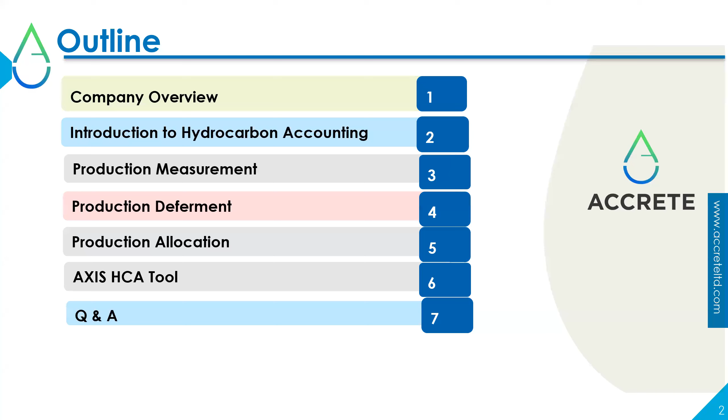So we'll start by introducing our company's services. Then we'll proceed to introduce hydrocarbon accounting and the basic concepts around it. Then we'll move on to production measurement, deferment, allocation, and then we'll discuss the AXIS hydrocarbon tool that we make use of in our company.

Okay, so what are our services? So we are into software deployment of integrated production modeling suite, which encompasses the state-of-the-art Prosper, MBAL, and GAP for managing our oil and gas services. Then we're also into digital oil field services or suite.

Then hydrocarbon accounting - they also offer consultancy services like integrated asset modeling and production optimization. Then other consultancy services includes wireless and remote field data gathering systems that collect data in real time from the field, more or less like a telemetry system. And then this data can be monitored in real time in the office or workstation, as the case may be.

So we also offer training, and highlighted on the screen are training courses on IPM and AXIS hydrocarbon accounting, petroleum engineering courses, and other petroleum business-related courses. We're also involved in other oil field services like wireline and slickline services, directional survey services, which is called gyro, completions and supervision services, drilling supervisions, and manpower services.

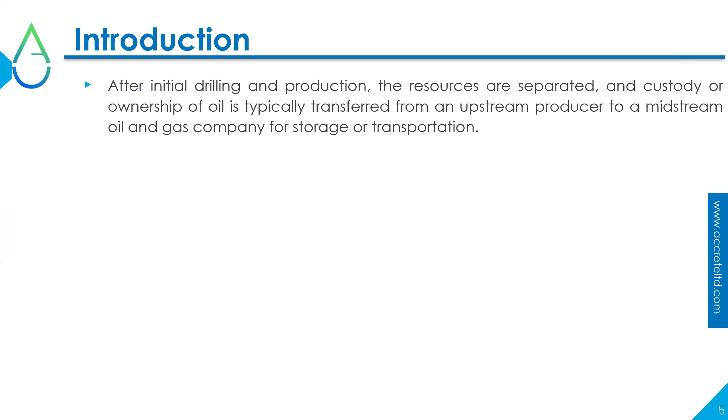As production commences in a typical oil and gas field, the resources emanating from different wells are channeled to a separator, as we all know. And this separator is made to separate the crude into oil, water, and gas components. However, depending on the completion types of the different wells in the field, it is important to calculate the contributing volumes of each stream coming from the different wells into the separator and the LACT unit.

But then there's a problem, okay? Managing commingled flows from different companies by calculating the contributing volumes made by each party becomes difficult because the volume that is measured at one point of the production system is usually different from the volume recorded at another point. That's because the crude is highly sensitive to pressure and temperature changes, and due to this sensitivity, when the pressure goes below the bubble point pressure of the fluid, gas begins to evolve from the crude, and then it causes the crude to shrink. So you now experience the shrinkage, and the volume that you recorded at the well becomes different from what you record at the flow station, and it's even reduced further by the time it gets to the LACT unit.

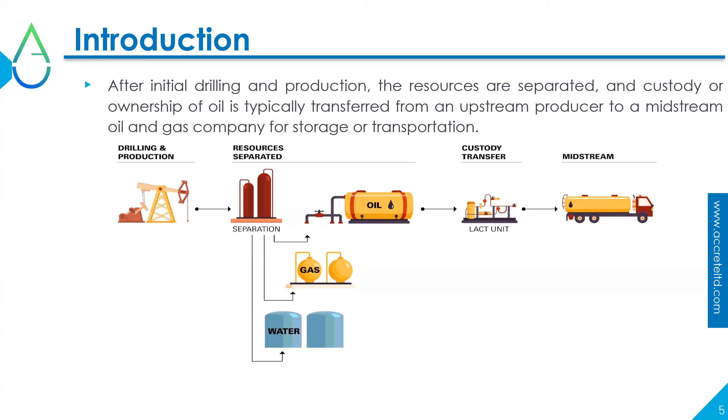So now, how do we calculate the contributing volumes from each of these wells to the LACT unit? It becomes very complex, and then it leaves a big question to be answered.

Okay, so what are the pending questions that we need to answer given the situation at hand? One of the questions is: how much of this oil and gas belongs to each contributing party?

You need to understand that depending on the nature of your oil field, you can have many wells, and these wells, depending on completion type, can be dual stream completion, where you can have two streams in the well. As a hydrocarbon accountant, you want to be able to account for the volumes of oil that each of these streams contributes to the flow station.

It also contributes to the LACT unit. So how do we establish or determine ownership of these contributing volumes from each of these parties? That's one question that we need to answer.

The second question that we need to answer is how do we establish ownership of these resources, considering that there are different joint ventures or partners that have different LACT units, and we want to establish ownership?

Let me give a more detailed scenario. Let's look at a situation whereby Company A has their own oil field, and whatever they are producing goes into a trunk line. Another company, Company B, has their own oil field which they channel into the same trunk line. So how do you establish ownership between the two parties? These are the questions we're going to answer in the course of this presentation.

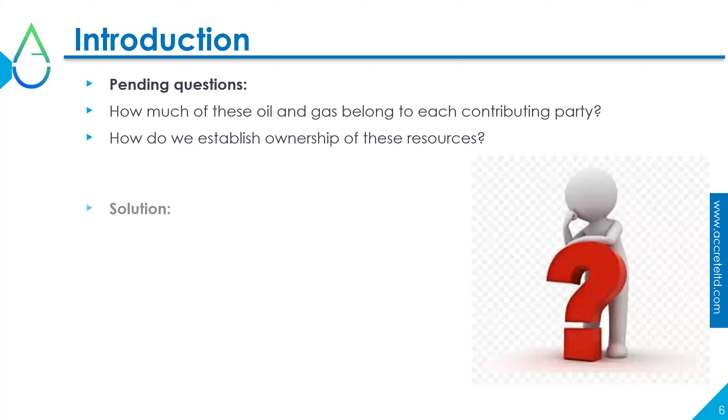So the solution to these questions is hydrocarbon accounting. It's the only way you can account for the contributing volumes from each party, and this is what solves the problem.

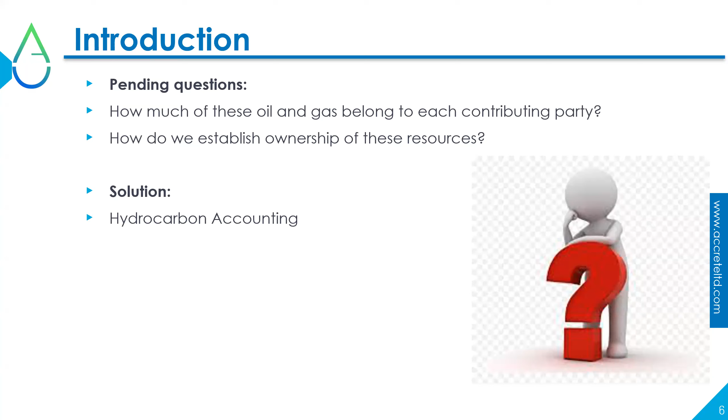So what is hydrocarbon accounting? It is simply a system by which ownership of gas, oil, and water is determined and tracked from the point of production to the point of sale or discharge. This is what gives us the solution to the problem I highlighted earlier.

We'll find out how hydrocarbon accounting does this in subsequent slides. But basically, in this snapshot, you can see the features of hydrocarbon accounting: production allocation, production planning, and it acts as a cash register. It enables us to perform reconciliation of our volumes from the wells to the flow stations, and from the flow stations to the LACT. We'll find out more in subsequent slides.

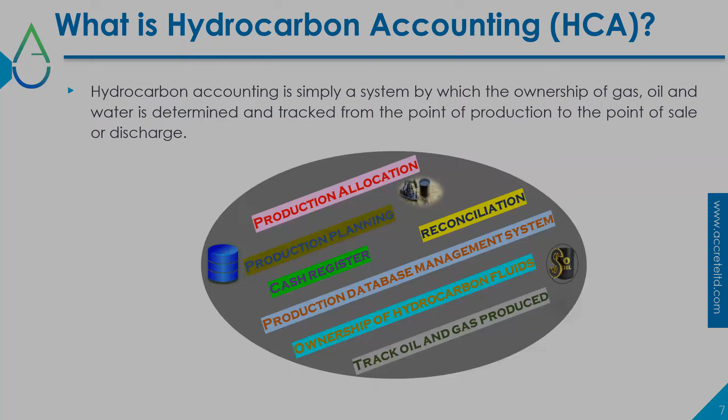So going forward, what are the key processes of hydrocarbon accounting? They are production planning, production measurement, production deferment, production allocation, and production reporting.

We need to be able to plan how much volumes we can make at the end of the month from this field or flow station. As a hydrocarbon accountant, when you're able to account for the volumes of oil and gas produced from different wells in the field, and attribute these volumes adequately and appropriately, it gives management the opportunity to make accurate decisions.

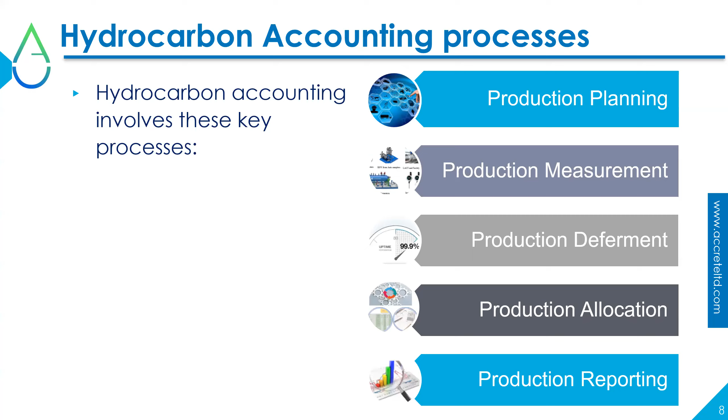So we'll start with production measurement. Before you can account for the volumes of oil coming from each of these wells, you need to be able to physically measure the quantity of your crude oil and gas coming out from your oil field. And how do we do that?

We need physical equipment and devices to achieve that. Examples of hydrocarbon measurement devices are the LACT unit, the PD meter, the Coriolis meter, the turbine meter, the auto sampler, orifice meter, and the ultrasonic meter. There are lots of meters available, but these are the few highlighted in this hydrocarbon accounting session. We're going to go into some of these measurement devices and explain how they work and the principles guiding them.

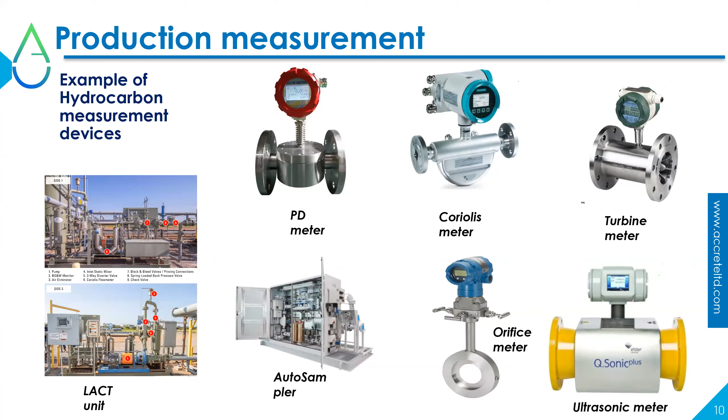So starting with the LACT unit, what is a LACT unit? I don't know if any of you have heard of a LACT unit, or maybe studied it in the material somewhere. In the course of this session, we would explain what a LACT unit means.

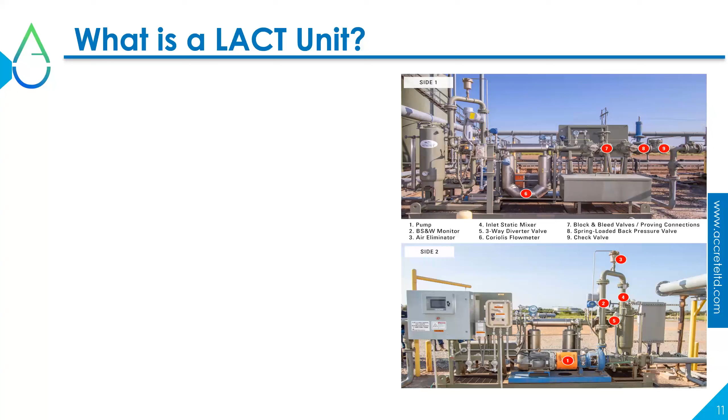The term LACT stands for Lease Automatic Custody Transfer. It's basically a piece of oil and gas equipment that is used to measure the quantity and quality of crude to be transferred from one company to another. We not only want to determine the quantity, but also want to establish or determine the quality of this crude. So the LACT unit assists with that.

It has different components, which are the pump, the BS&W monitor, the air eliminator, and other components, as you can see displayed on the screen. We're going to explain briefly what these components stand for and how they work hand in hand to achieve the major objective, that is to measure the quantity and quality of the crude.

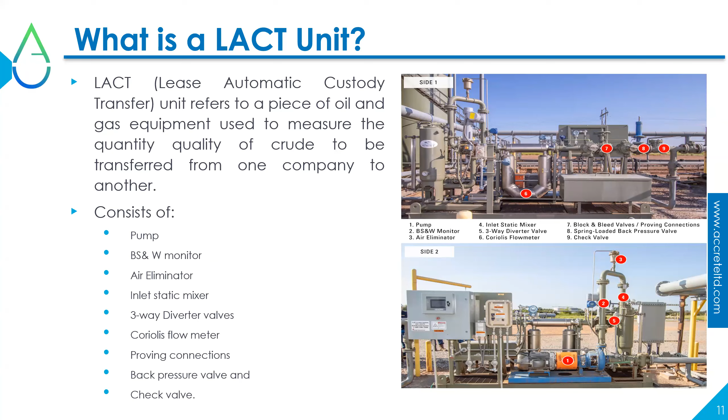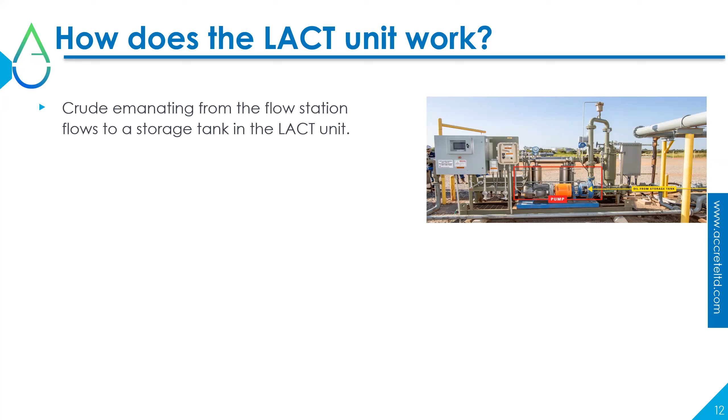So how does the LACT unit work? The crude emanating from the flow station flows into a storage tank in the LACT unit. If you look at this diagram, to the left you see there's a tank there. The crude coming from the flow stations enters into that tank, and then there's a pump, as you can see on the screen, that draws the oil from the storage tank into another section called the BS&W monitor.

The BS&W, as you all know, is the basic sediment and water. So what the BS&W monitor does is measure the levels of BS&W contained in the crude.

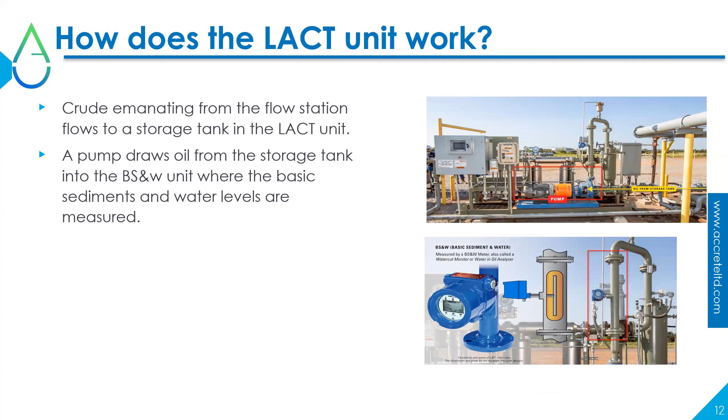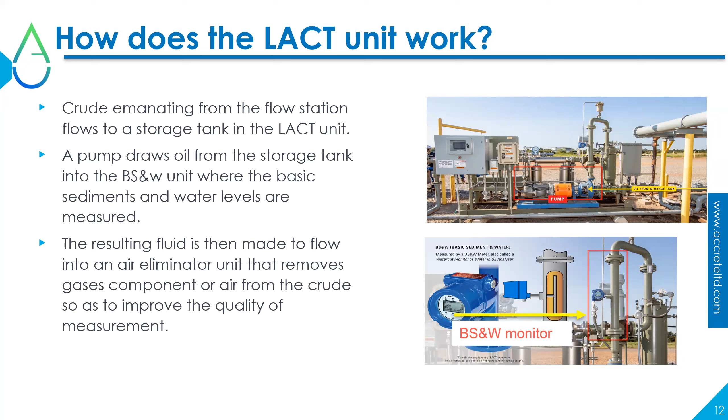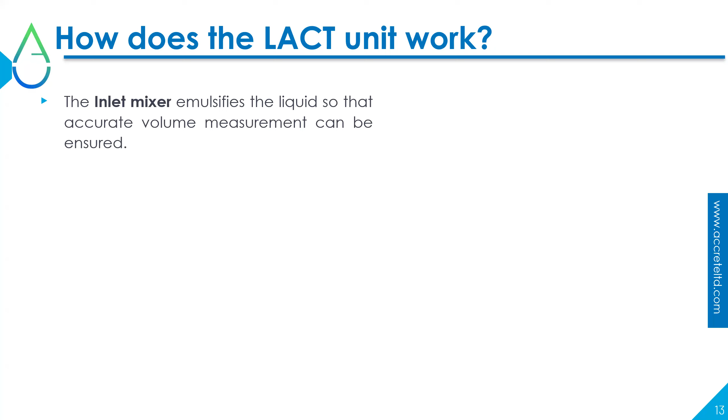Then there's an inlet mixer. After the process fluid moves from the air eliminator, it goes into the inlet mixer, which emulsifies the liquid so that accurate volume measurement can be ensured. If there is two-phase flow in the pipe, the meter may not give an accurate reading for the fluid, because it might give a reading for just one phase. We want to agitate the fluid a little to enhance the quality of measurement, so the inlet mixer emulsifies the liquid to improve measurement quality.

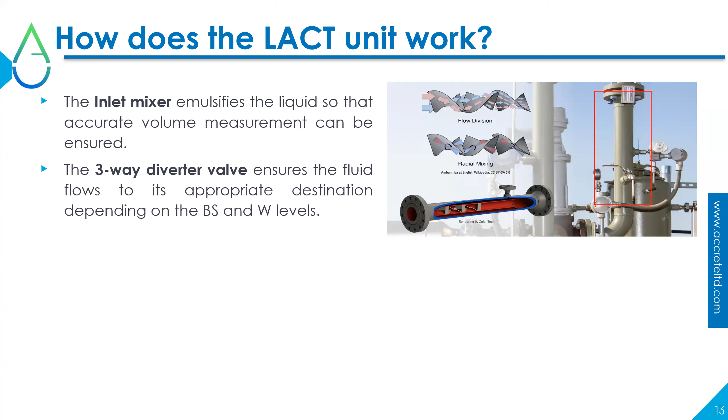From the inlet mixer, the fluid goes into a three-way diverter valve. What this valve does primarily is channel the fluid to its appropriate destination. There are a series of tests that occur in this three-way valve. First, it needs to ensure that the BS&W content in the fluid is within the acceptable limit.

If it is not within the acceptable limit, it moves this fluid into another separate tank called the bad tank. That bad tank will use natural techniques to separate the BS&W from the crude, and then we channel the crude back into the unit for further analysis.

If the BS&W content in the crude is exceedingly high, the three-way diverter valve will channel this fluid into another separate chamber called the heating chamber. What the heating chamber does is heat up the fluid to reduce the BS&W content before rerouting it back into the LACT unit.

If the three-way diverter valve checks it and sees that the BS&W content is within acceptable limits, it channels the stream into another section where the Coriolis meter, or a flow meter, is for measurement. In the subsequent slide, we would discuss how the Coriolis meter works.

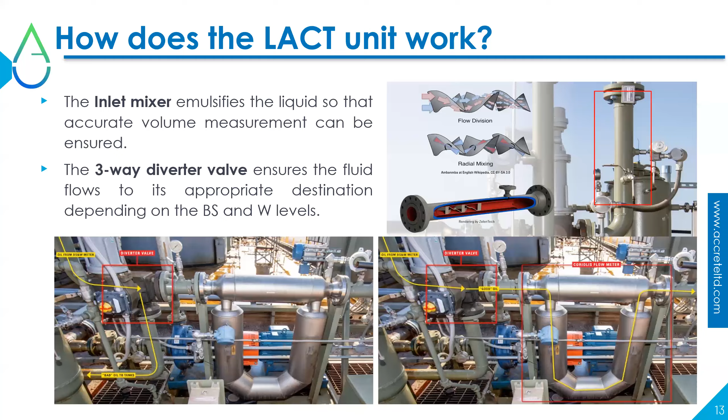Okay, so what is a Coriolis meter and how does it work? A Coriolis meter is a typical example of a flow meter. There are other flow meters available, we have PD meters, ultrasonic meters - these are basically flow meters. And the Coriolis meter, how does it work?

It uses the principle of motion mechanics, which means the meter basically splits the process fluid into two coils, oscillating in opposite directions. As you can see displayed on the screen, there are two coils there, and the meter splits the fluid into these two coils, and the coils are made to oscillate in opposite directions. When this oscillation starts, voltage is generated, sine waves are created, and the time delay in motion is proportional to the mass flow rate. So this is how it calculates or determines the flow of the stream.

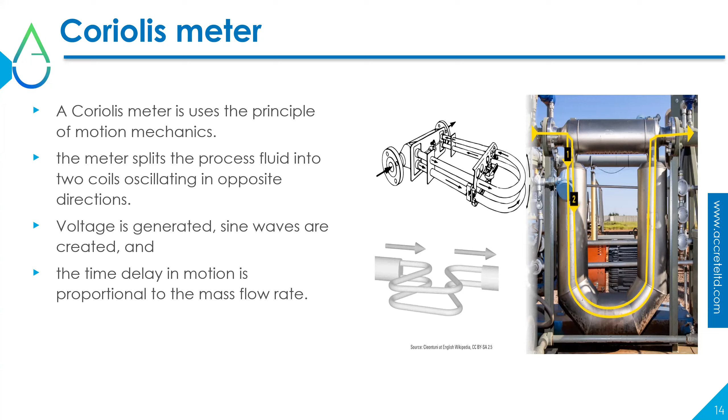So from the Coriolis meter, where does the stream go? The stream moving from the Coriolis meter goes into a set of valves, the back pressure valve. What this valve does is it also has proving connections that house proving meters. We want to ensure that what was measured in the Coriolis meter is correct, to improve precision. There has to be a proving meter in the back pressure valve and proving connection section, just to verify the precision of what was measured in the Coriolis meter.

And then from this valve, it goes into another valve called the check valve. What the check valve does is prevent the backflow of the measured stream into the line. So after this stream has passed through all these sections and has been measured in the Coriolis meter and the proving meter, we don't want this fluid to go back into the line.

So the check valve is there to ensure that. From the check valve, where does the stream go? After all this, the pressure of the stream will have become very low, usually within 45 psi. So then we need to energize this fluid, because we need to transport it to other booster stations or to another midstream sector. To do that, we need another pump called the PCP, the progressive cavity pump. What the pump does is increase the pressure of the fluid so that it can be transported to other booster stations or its final destination.

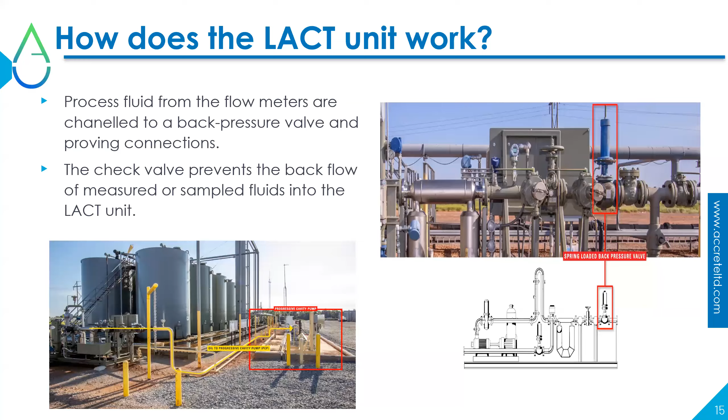Okay, so now I want to believe we now have a first-hand information or knowledge of what a LACT unit means.

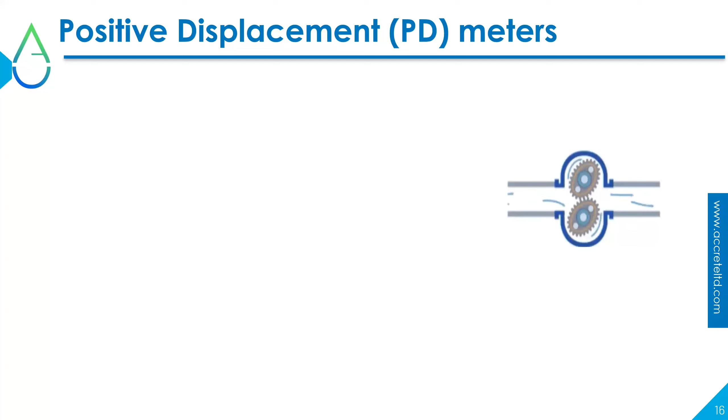So moving on, we're going to talk about the positive displacement meter. How does it work? Pockets of fluid are trapped between rotors housed within a high precision chamber. As can be seen displayed on the screen, there are two rotors gliding against each other, and the stream is made to flow into these gliding rotors. The rotational velocity of these rotors is directly proportional to the flow rate of the moving fluid, and that's how the PD meter calculates or determines the flow rate of the fluid moving through it.

For the sake of time, I won't be able to explain all the types of meters available, but there are other types of meters very useful in the oil and gas industry, like the orifice meter. The orifice meter is not a direct meter like this, it's an indirect method using pressure differential, delta P, to measure the flow rate of gas most of the time. It's used for gas measurement. We also have ultrasonic meters that use the propagation of sound waves or signals to determine the flow of the stream passing through it.

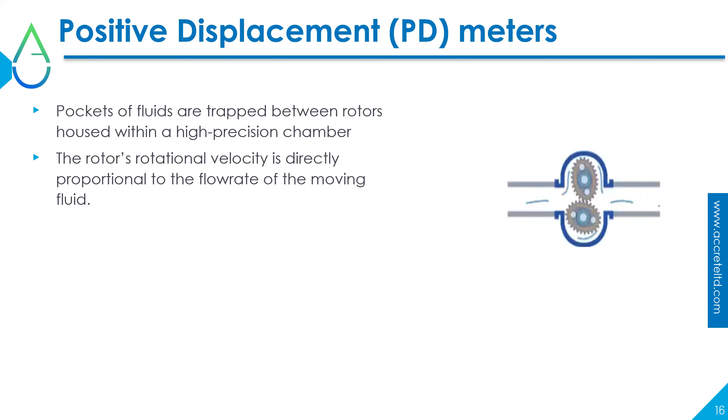It's called the alpha LACT. Now this LACT will measure the combined volumes. So you've measured the volume at the different flow stations, and then all these volumes are channeled to another unit called the LACT unit, which takes the combined volumes of the entire stream. So how do we appropriate or allocate the volumes to the well? How do we establish the contribution of each of these wells to the LACT unit? That's where hydrocarbon accounting plays a huge role.

So what is production deferment? Deferment basically is the reduction in production caused by an activity, breakdown, trip, poor equipment performance, etc., that results in a reduction in volume sold, thereby delaying production until a later time. Without using too much vocabulary, deferment simply means we want to account for the volumes of crude that we did not produce within a period of time.

There are concepts used in hydrocarbon accounting for deferment: uptime and downtime. Typically your wells are meant to flow for 24 hours a day. If the well has been flowing for 24 hours of the day, that's the uptime. But sometimes the well can just flow for maybe 18 hours, and in the next 6 hours we have to perform well tests on that well. So for that 6 hours where we were performing well tests, you were not actually producing. Production has been deferred.

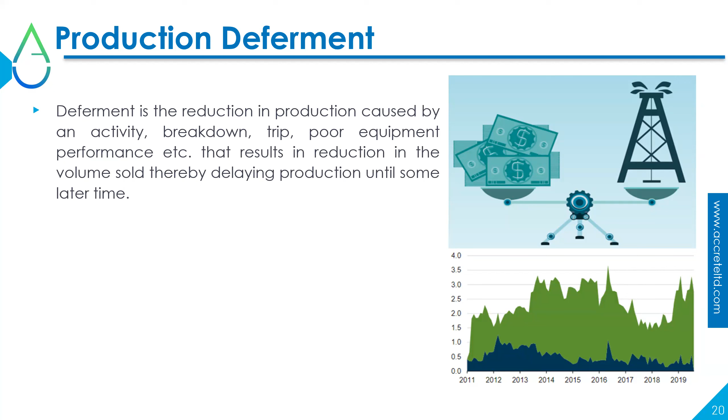We also need to account for the production that was not made due to an activity performed on that well. It could also be due to other issues, not necessarily an activity - it could be a safety procedure, maybe we have to shut in the well for a particular reason. Detailed tracking of the reasons for deferment for any period of time provides valuable, time-sensitive insight into necessary remediation measures to get wells and facilities back to production. Over time, it also provides awareness around trends that may be occurring from specific wells, facilities, or pieces of equipment.

Okay, so that's pretty much all about production deferment. Although when we start production allocation, you understand the importance of production deferment better.

So what is production allocation? Allocation is the process of recalculating the contribution of various streams to commingled flow, depending initially on the flow measurement. You see that all these hydrocarbon accounting concepts are interwoven and interconnected. If you don't understand production measurement, you may have difficulty understanding production deferment or allocation, because before you can perform allocation, you first need to measure the volumes coming from the different contributing streams. So what allocation does is we need to back allocate the production of oil, gas, or water back to flow stations, the wells, or even the pay zones, if need be, depending on the requirements of the clients.

In other words, allocation is a term used to describe the system by which ownership of oil, gas, and produced water is determined and tracked from the point of production to the point of sale or discharge. The allocation system therefore has a direct impact on revenue. This makes hydrocarbon accounting the cash register of a producer's oil and gas business. To carry out allocation, the entire allocation process is divided into tiers.

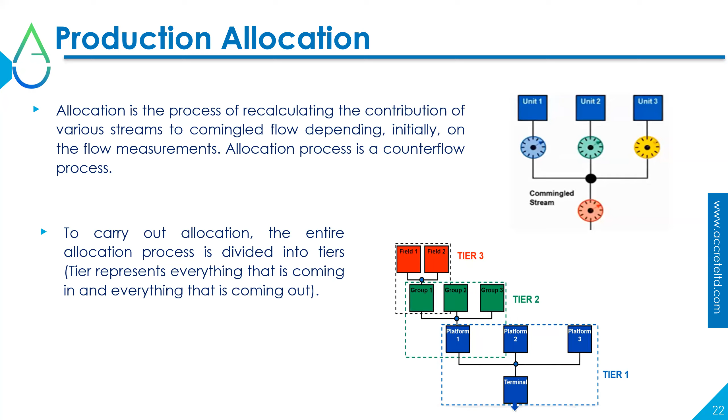So what are the types of production allocation that are available? There are different types of production allocation, different materials with their different types, but in simple terms, production allocation is broadly classified into two: fiscal allocation and field allocation. These are the two broad categories of production allocation.

So the first category, fiscal allocation, involves apportioning volumes to individual contributing fields or owners based on agreed methodology specified by the parties in their commercial agreement or contract. It forms the basis for sales revenue to the owners of the field. In simple terms, fiscal allocation is performed when there are different joint venture partners or joint venture parties involved.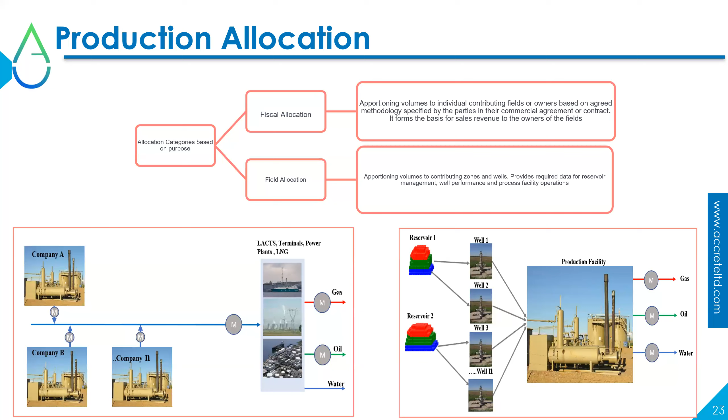That being said, let's move on to production allocation calculations. In a jiffy, I'm going to explain how we perform production allocation calculations in the oil and gas industry. So let me fully explain some concepts that you need to understand.

So there's the gross liquid. I want to believe that the majority of us here on the call are petroleum engineers, so you must have heard of this. The gross liquid consists of both the quantity of oil and water. Let's call that X barrels per day. And then we have the BS&W, which is the fraction of the gross production rate that is water. So whatever you are getting from your gross, the fraction of that production rate that is water, in percentage, is your BS&W, which is your basic sediment and water.

And then the water volume is calculated by multiplying, the water rate is calculated by multiplying the water cut.

You multiply the water cut by the gross to get your water rate volume. Then the net oil is simply derived by multiplying the gross by 1 minus the water cut, so you get the net oil. Okay, I want to believe you understand that.

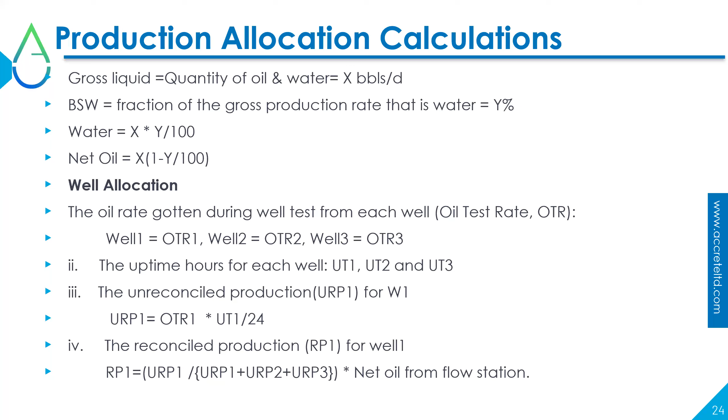So let's back allocate and get new volumes for party A and party B, using the allocation formula illustrated in the previous slide. For unconsigned production, company A's volume is 350 divided by the sum of 350 plus 100, which is 450. You multiply that by the volume at the LACT, which is 390, giving approximately 303 barrels, and 87 barrels for company B.

So now we have new volumes apportioned to party A and party B. Now we want to recalculate the contributing volumes from the wells to company A. Note that the new volume allocated to company A is now 303 barrels, as opposed to the 350 barrels that was there initially. If you do the same calculations, you get that result.

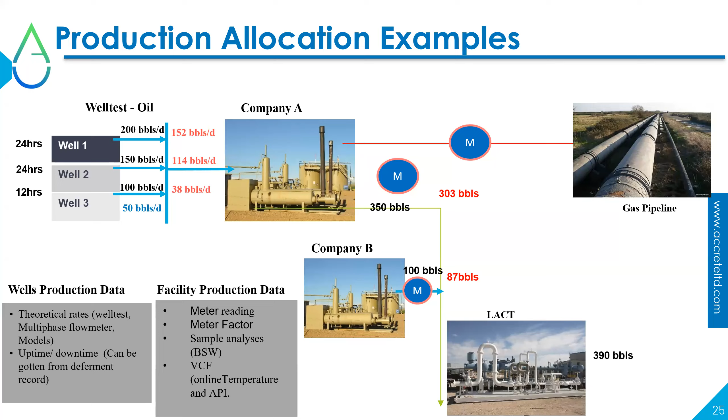So without wasting much time, let's move to the Axis hydrocarbon accounting section. We'll spend quite a while, but let's see how far we can go.

There are different software that can be used to perform hydrocarbon accounting in the industry, but at Accrete we make use of the Axis hydrocarbon accounting system or tool. I'll explain the features briefly. These are the features of Axis: sample analysis, forecast, metadata, validation, allocation, audit logs, approval, reporting, etc. Let's go into details of what the tool stands for.

Looking at field data, Axis gives clients the opportunity to get data in real time from the field using SCADA systems, so you don't have to manually input it yourself. Tasks can be automated in the system so you don't have to do the process manually all the time. It can also act as a repository for storing your data so you can reference it at your own time.

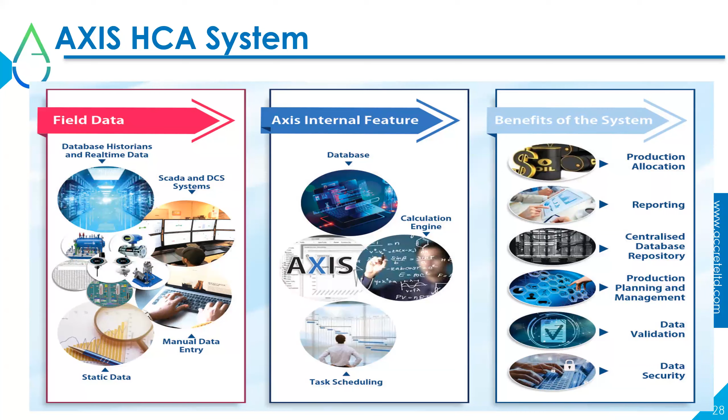Moving on to the Axis architecture: it makes use of Microsoft technology, which primarily runs on Windows. There's the application server, and there's also the database server. The database server can be hosted locally or on the cloud, depending on whatever the client wants. If you want your database in the cloud, you can opt out for that option. Then there are also client computers.

The client computers are made to point to the application server and the database server, whether it is local or on the cloud. The tool runs on the browser, so the deployment is pretty much easy. You don't need to install rigorously on different PCs.

All you just need to do is to ensure that they are on the same network, and then you are good to go. So thank you very much for paying attention to this webinar.